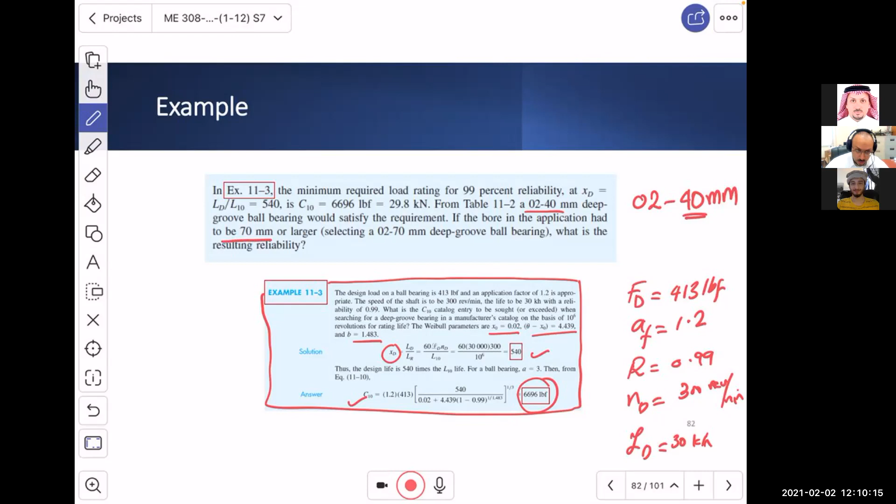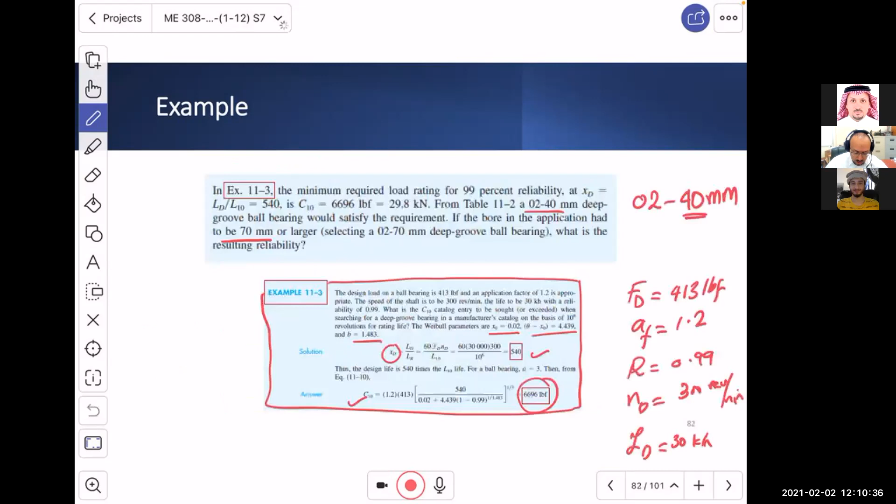Now, what does that mean? Again, I brought you here Table 11.2 for deep groove ball bearings. And what we solved the problem for, which is 11-3, is that we found the load here, 6,696, that was in pounds. And if you convert it and get the nearest, you will find that this bearing, which is rated for 30.7 kilonewton, is good.

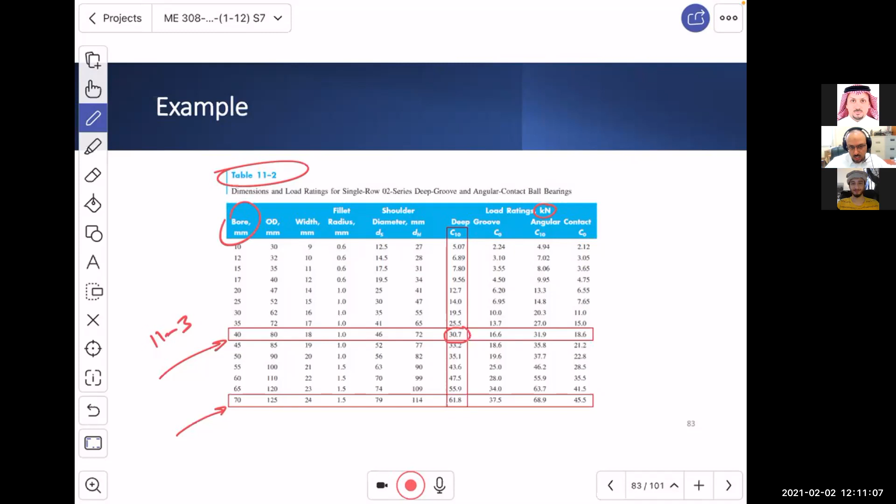Now, what did we use? We used 70. Why? The bore size. We need 70, and there are many reasons why we end up changing the size of the diameter. So that will give you double the rating, that's 61.8 kilonewton capacity.

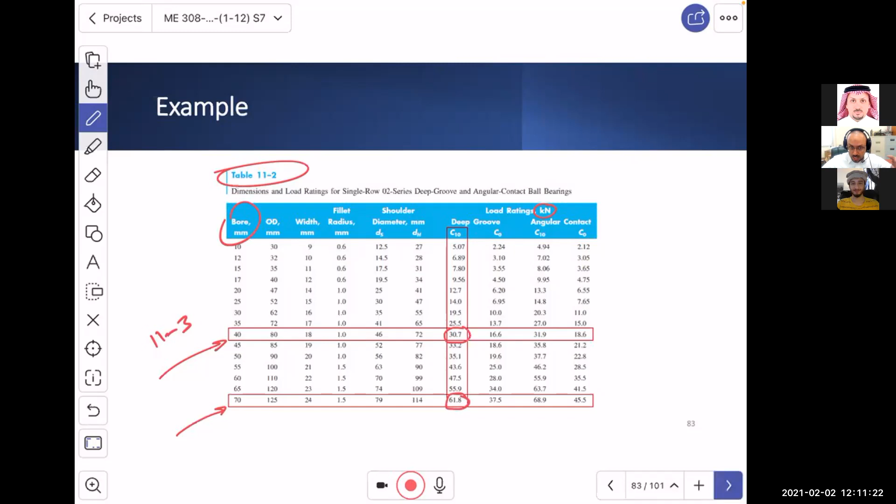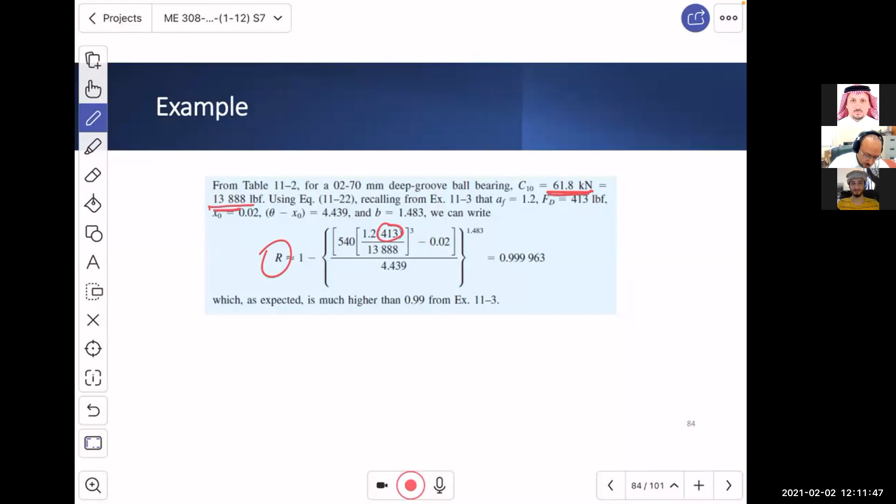So what happens is this: if you want to know the current reliability, you take the 61.8 because you use the bearing with this catalog value. You convert it into pound force because when you apply the equation for reliability, you are using 413 pound force, so you need to be consistent. The life measure is here, this is the rated value C10 over here, and then the Weibull distribution and so on.

So what did we get? We got 0.999963. That's the reliability. Of course, this is expected, and it is much higher than 0.99. Now remember one thing, the wording says it is much higher. Why? In the end, somebody would say 0.99 is almost 1, and 0.999963 is also almost 1.

So what is 'too much' over here? Well, just think about it. I can ask you to go home and keep changing C10 to a higher value, higher value, higher value - same load, everything is the same. And you will see that this is just going to increase a little bit each time. And you can think of it, we doubled the rating.

Previously, we used 40 millimeter with a capacity of 30.7 kilonewton, and what did we get? We get 0.99 reliability. We doubled the force capacity to 61 kilonewton, and how much did we get extra? We got 0.999963, so we got an addition of 0.009963 in the reliability - you may underestimate it. But look, you have to push double in order to get only this. Yet it is considered too much compared to 0.99.

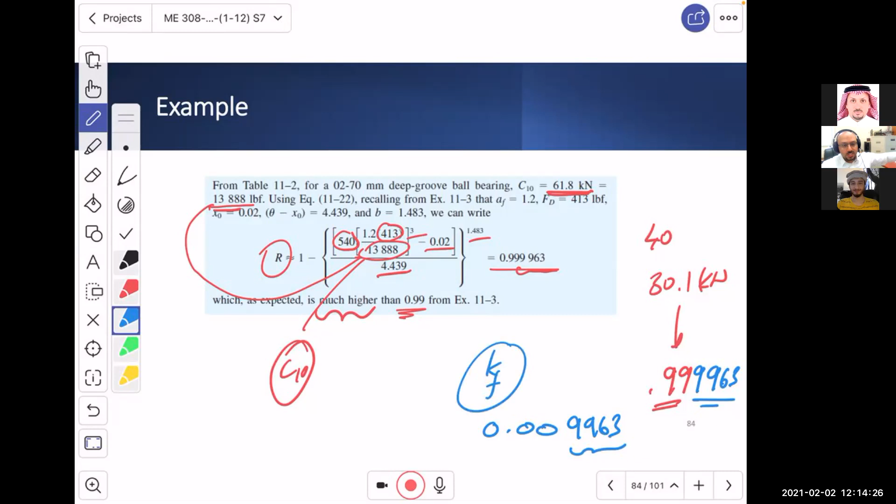Did you get it? So that's when we talked about it in fatigue. We told you, if you recall, in fatigue chapter 6, if you want to have a Kf in the endurance limit increased, to be reliable at 0.9, that factor was very big. But if you want 99.99999, like 5 nines after the decimal, you need to multiply the endurance limit by nearly 50%, if I'm not wrong. I don't recall the exact number.

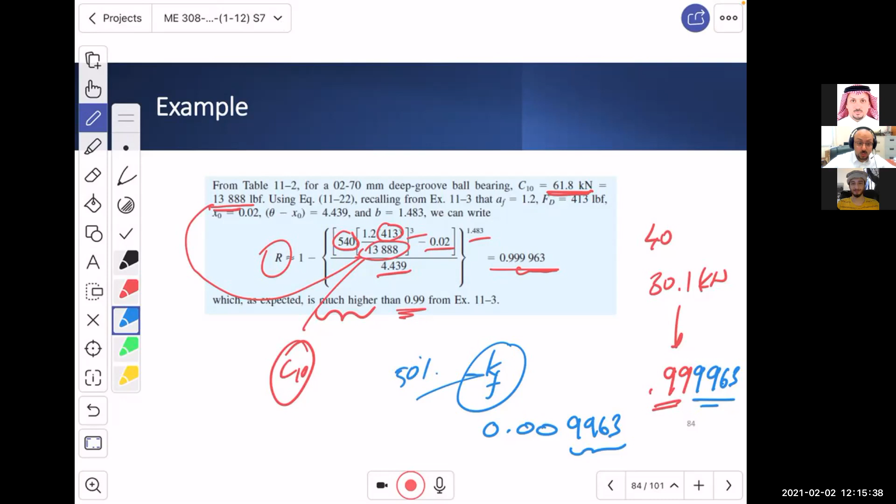So you have a 100 kilonewton, let's say, endurance limit, and now you need to pretend that you have only 50 just to secure a reliability of 0.9999. Can you imagine that? I just want you to understand the magnitude of this thing. So this 0.009963 is not easy to get - that's why it is too much. Understood? I hope so.

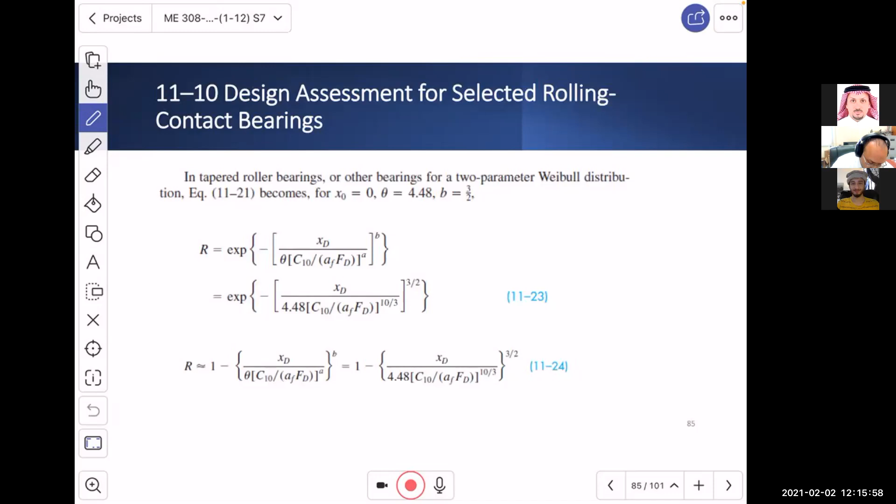Now, what happens if we have a tapered roller bearing? We can use the same equation. Just keep in mind the Weibull distribution parameters: X0 is 0, we talked about this, and you need to remember that A is 10 over 3. So you can just use the same equation.

So if we go back to the problem that we solved in the last class, this is the argument I was talking about. We found by calculation that C10 is 12,100 Newton. And then we said that the reliability was - let me show you this, I need to go back to convince you why the solution did that. So if you go back to the question, it says that if the reliability of the bearing set is to be 0.99, the bearing set - and then we said that the reliability goal is supposed to be the square root of 0.99, which equals 0.995. That's what we said.

So if we go here and look back at this problem, what did we do? We picked bearings, and those bearings, which have a cone and cup as these, if you go to the catalog, then you will find that C10 is this much.

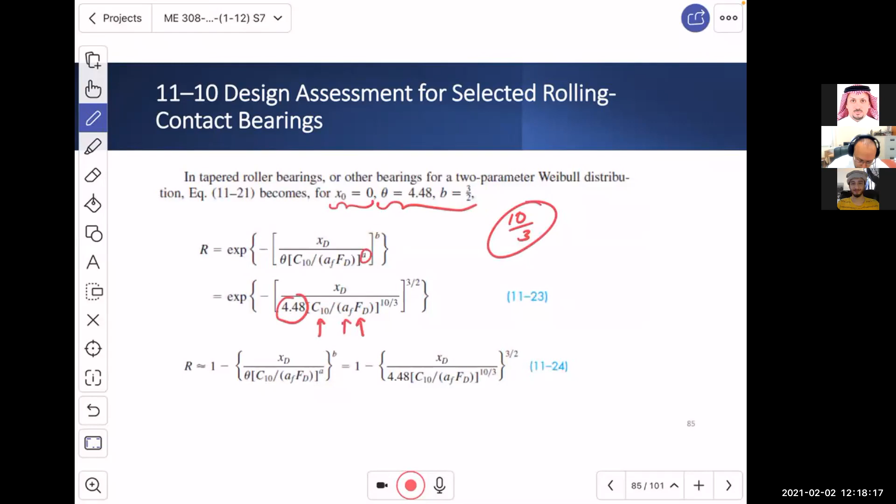Now look, this is C10, this is the application factor, and this is the load. I hope, ya shabab, that you remember that this is FD. It was 4,938. If you got this confused, go back and check it in the solution.

This is what? B, and this one is the A. This is not 1 over B, this is not 1 over A, because we're solving for R, not solving for C. If it is C, then they will have the reciprocal.

Now, how much did we get the reliability? We will get the reliability as how much? 0.99479. Good.

Is this good? In the solution, we said yes, it is. And the question was, how? This is less than the goal. The goal, which is RD, was square root of 0.99, which is 0.995. So what happened over here? We said, that's okay, because the client, you can't force the client. The client said, I want the reliability set supposed to be 0.99.

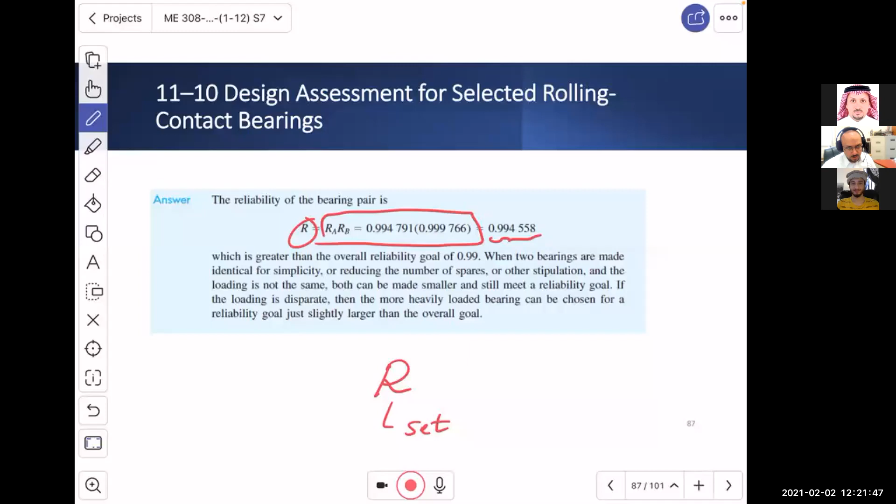And then I told you I have bearing A with a reliability of 0.99 and bearing B with a reliability of 0.97, for example. Then if somebody asks you, what is the reliability of the entire machine with respect to bearing? You multiply both reliabilities, right?

So what happens over here? The reliability goal, remember, I'm going to show you one thing here. Look, I'm going to go back to the question over here and look carefully. When we say the reliability goal, we said that this is RD, which is equal to square root of 0.99, which is equal to 0.995. What did we call it? We call it the desired reliability. RD is what goes inside the equation, for what? For one particular bearing, not for both.

One particular bearing. So we take the square root of the reliability set in order to assign it for the bearing itself, one bearing. Do you get that?

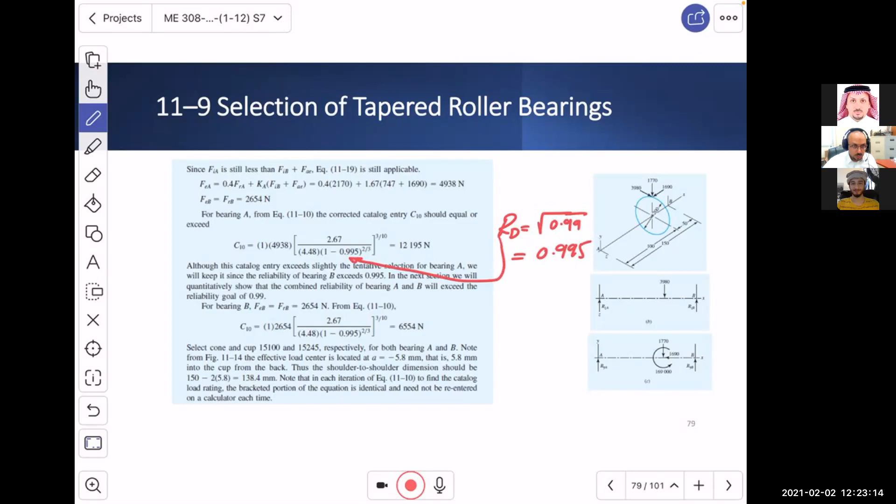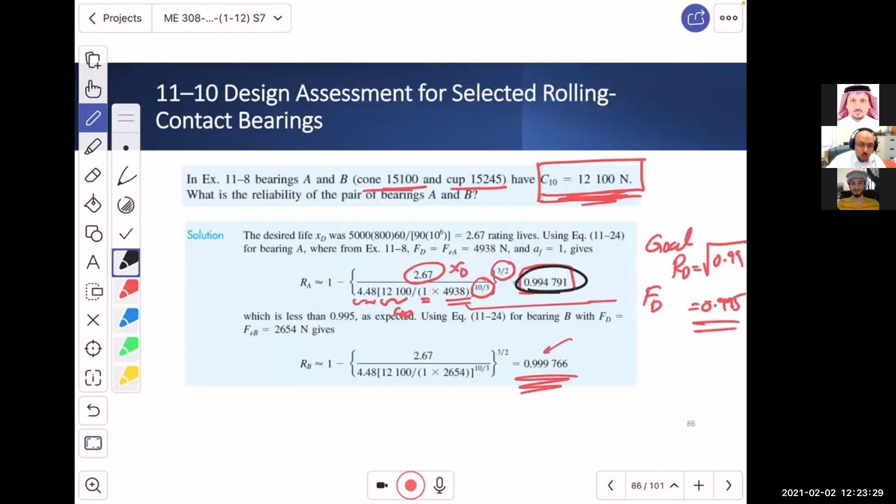Yes. Okay. Now, but what if I picked two bearings like here? I picked two bearings and each one has its own reliability. This is RA and this one is RB. So we go back to the old equation which says that the reliability for the set is the multiplication of both RA and RB.

Now, this reliability is supposed to be compared to the one which the client asked. The client asked for 99%, 0.99 for the set. So what did we get over here? This is supposed to be compared with 0.99. We got 0.994558. All of this is considered much more than this.

So we are good. And that's the reason, listen, that's the reason why in the question it says, oh, the reliability of bearing A alone is less than the goal, less than 0.995.

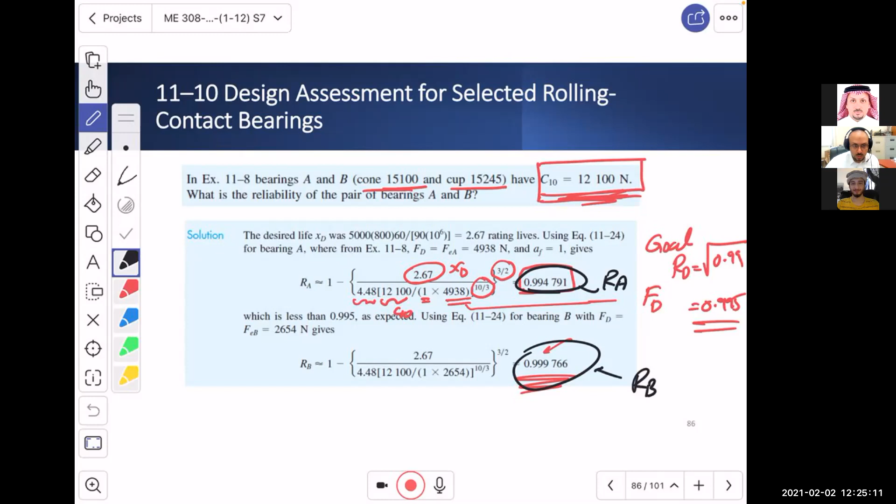It's less, it is 0.9947. But we said it's okay. Why? Because the client is focused on one thing. He said, I want the reliability to be 0.99. As far as the reliability is 0.99, I'm okay. Of course, this is not always the case. Some other client will tell you, no, I want them both to be not less than 0.995. And that's another thing, you understand?

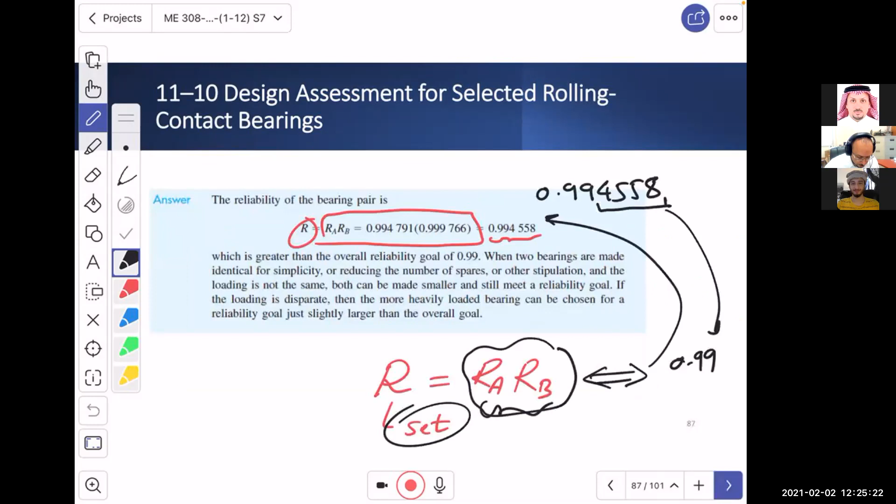Any other question, ya shabab? Okay, now in the next problem, okay...

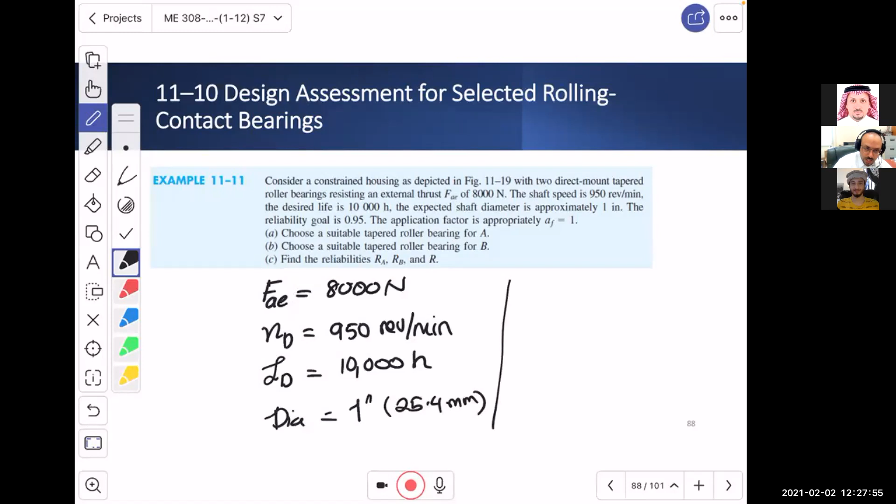You get that? The goal of the reliability, what is it, ya shabab? It's what we used in the equation, which means the reliability of the bearing is supposed to be 0.95. The application factor equals 1, and we want to find a suitable tapered roller bearing for both A and B.

Now, first thing first, there is no radial load, there is only a thrust load. And this is where things become a little different, not as we used to.

So if you recall, with tapered bearings, we are designed to understand that there is a bearing which will carry the thrust load, and there is a bearing which will not. The bearing which carries the thrust load will have two forces acting on it: 0.4 times the radial load, plus K multiplied by the axial load.

Now, what we did before is we said, look at this, this is the axial applied load. Interestingly, just last class, we said this bearing will be subjected to two radial loads. This radial load will generate an axial load and a radial force, and this one will have a radial load and an axial force. And then what did we say? We said combine this and this into one force against the blue one, and that's how we would know which bearing is going to be squeezed, and thus it is the bearing which will have to handle both radial and thrust.

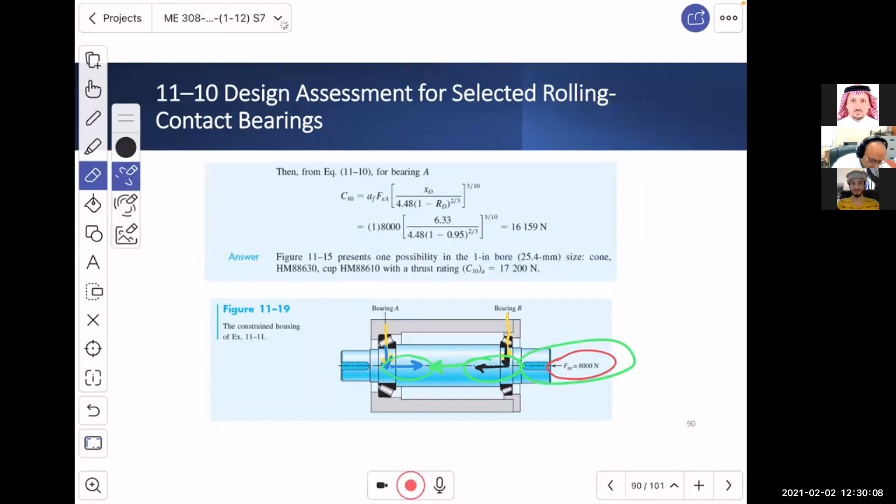Well, all of this discussion is meaningless here. Why? Because there is only one thrust load, and it is pointing toward the bearing on the left. So this bearing is bearing A. Interestingly, this means this bearing will carry all of the thrust, and bearing B will carry zero radial load, zero thrust load. It's just sitting there alone, doing nothing. That's where it gets weird.

So if we do that, and you truly believe it, then you will know that FrA is the same as FrB, which equals 0.

Yeah, this is it. FI is equal to 0. There's no radial load, and if there's no radial load, remember, the induced load because of B is equal to 0.47 FRB divided by KB, which equals 0. And the induced load FIA is also 0.

In that case, you end up with the axial load at A being the same as the axial load applied at the shaft. What is the reliability? Both of them should have a reliability of 0.95. We can use that right away inside the equation.

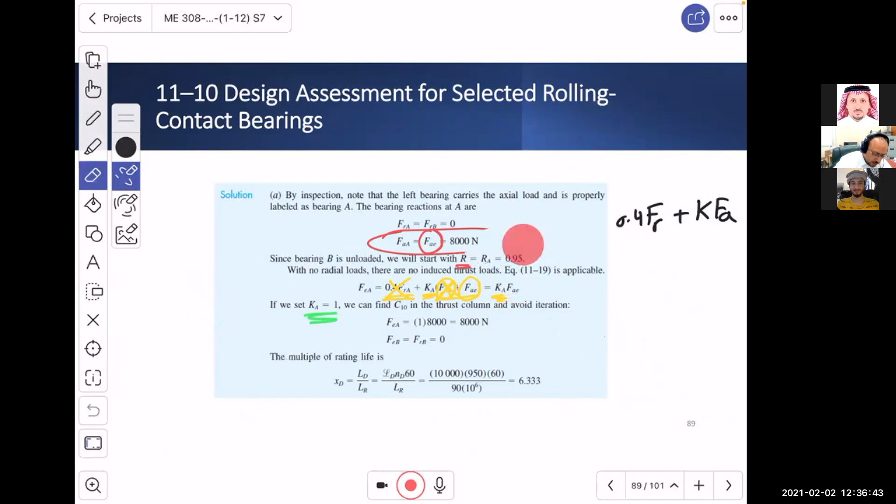That's it. Okay. Okay. Okay, alright.

What, can you repeat the question again? Wait a second. Yeah, I said, is it like the ball bearings part where if we're before E, FR and FA are almost equal, and after we cross E, we have to increase the thrust value? Sorry, FT and FR are equal to each other. I got you, before E. Yeah, I got you, I got you.

Well, what happens is that's not the case though. Why? Because before E, the curve goes as a straight line. Let me see, no, that's not the case. Sorry, I said yes, but this is wrong. Before E, the curve goes as a straight line. That straight line is not the same as a curve which is inclined with a slope y equals 1, which is what we are saying right now.

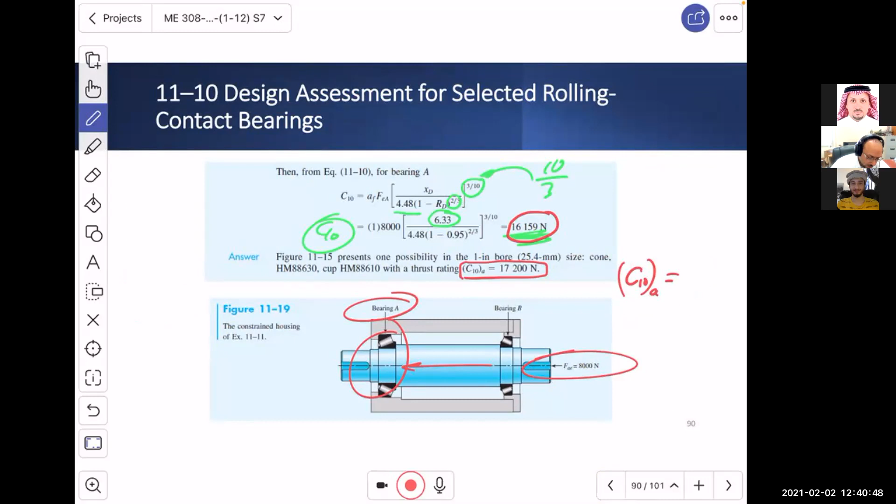C10 is 16,159. So the catalog value for this bearing is higher than that, which is 18,400 Newton. And C10A, that's the C10 axial, the rated axial load for this bearing, is 17,200 Newton. All right, so that's the value over here.

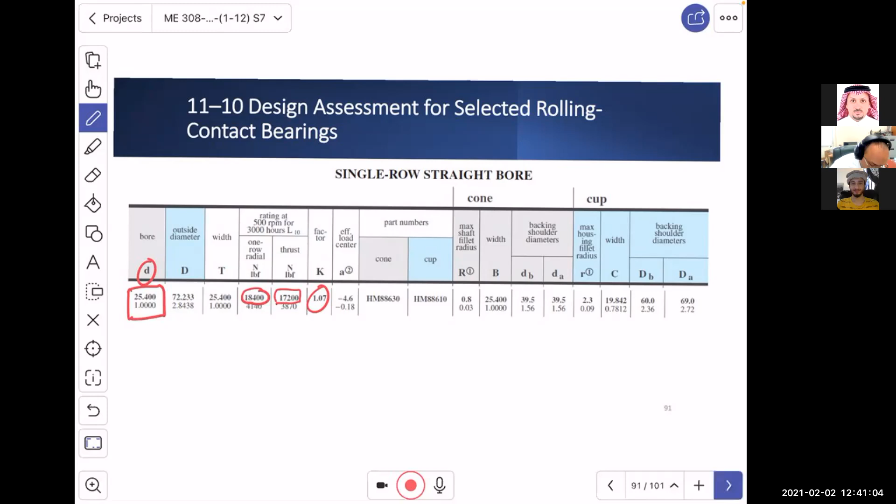Did you get this? Yeah. All right, so next is to go and calculate the reliability.

So if we want to calculate the reliability, we need to put XD. Look, these are the Weibull parameters. We are using the thrust load catalog value, because the load that we have is only a thrust load. And what happened over here?

If we put this, notice that FD for bearing A is equal to what? 8,000 Newton. Was it in Newton or in pound force? Newton, yeah, 8,000 Newton. So when we do that, what did we get? We get a reliability of 0.963.

That's more than the goal. The goal was 0.995. Okay? No, this is, no, 0.95. The goal, what is it? Let me check the question. Yeah, the goal was 0.95. Okay, so this is more.

Why? Because we have a load which is like 16,000 something, and we put a rating of 17,000, so we got a little bit higher reliability. For the other one, the load over here is 0. So you can imagine that if you have 17,000 divided by 0, it's going to get you an infinity. This number divided by infinity will push this to 0, and you will have 100% reliability. Well, of course, there is no loading acting on it.

So the combined reliability now is the reliability of bearing A and bearing B multiplied by each other, and this is what we got. Understood, guys?

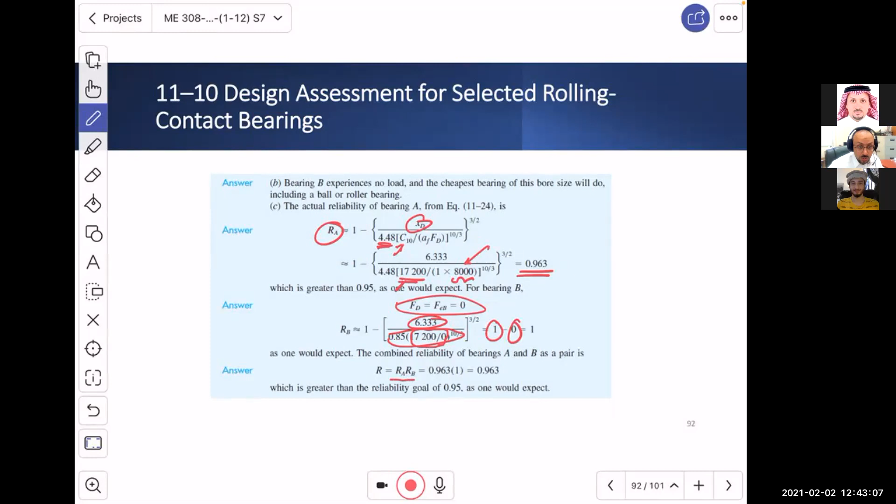Yes. Okay, now there are a few other things that we need to go over with respect to the bearing, so I'm just going to talk about them briefly over here.

I would encourage you, these are the kind of situations that you will see in the industry. I know some of you, or maybe the majority of students, think that we are teaching you stuff that you don't use in the industry. But if you go and read this book, especially the writing, you will find a lot of information that is actually very practical in the industry.

Also, I would like to tell you, and you know this more than me, if you found any information that you are not familiar with, go and search it. This material of bearings and gears is very popular. You can see a lot of videos on YouTube and the internet.

So in here, for example, we are talking about the matter of fitting the bearing. So we have an annulus over here. So we want to make sure that that annulus, for whatever practical reason, will not be bigger than the outer diameter of the bearing, so the bearing can sit from this side.

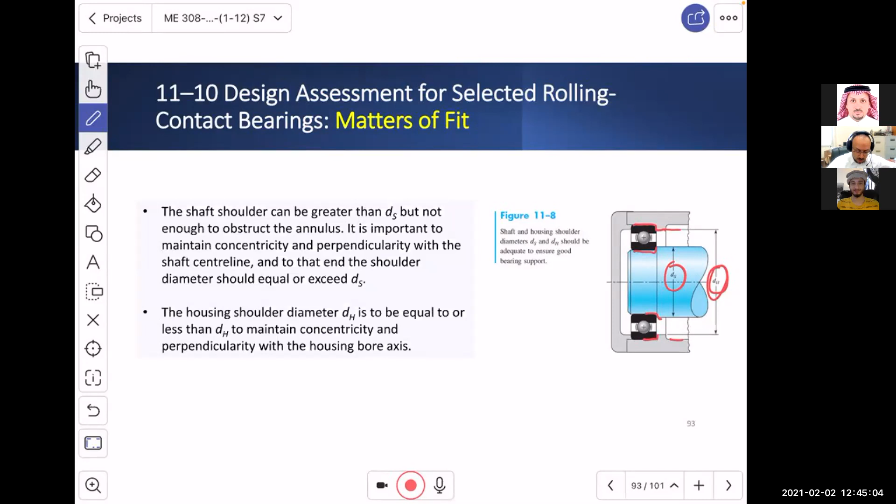Also, we have the shoulder here of the shaft, which is also very important for placing the bearing in its position. So you want to make sure that the sizing for the other parts of the machine, like the housing, the outer diameter, the big diameter, the small diameter, are all aligned with what's supposed to go with the bearing.

Similarly, if you have a tapered bearing, we all know that we have here like dB. Look at it from the back, this diameter, as well as this diameter, as it is explained in the textbook.

You want to make sure that these diameters are within the seating arrangement. So if you put the bearing from the back or the front, you want to make sure that these diameters are within an acceptable tolerance and size with respect to the shaft and the shoulder.

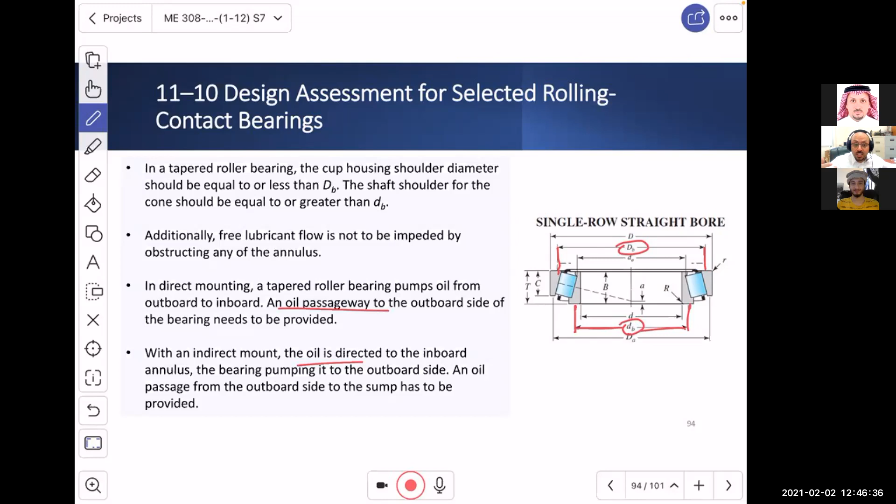You also need to understand that most bearings, especially in industrial applications, need lubrication oil. So a turbine or a pump is equipped with a whole system with a pump, storage, filtering, and cooling where oil circulates. You need to keep in mind that this circulation of oil means you need supply pipes and tubes, one to take the oil out and one to push the oil in. That needs to be considered while fitting up the whole thing.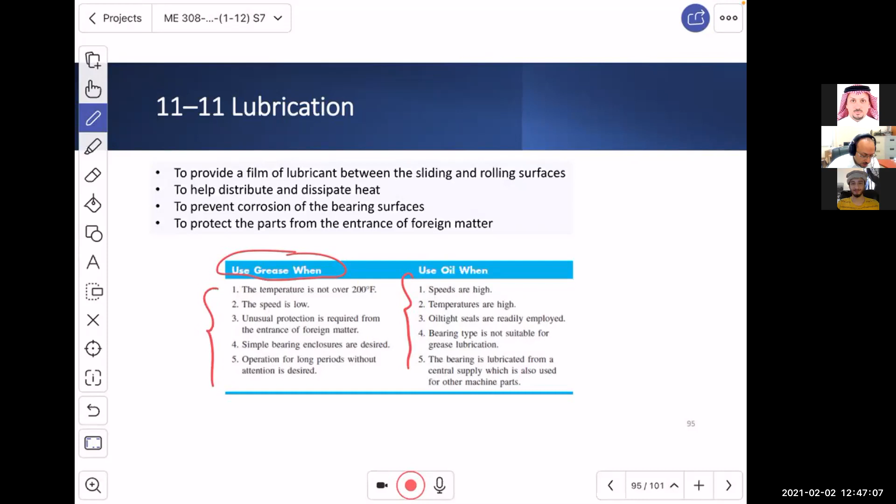Now, with respect to lubrication, we have two types. One is called grease, and there are recommendations for when to use grease, and the other one is oil. Grease is more viscous than oil. Oil is runny, and its viscosity is different than grease. You will see that this is also related to some other issues, which I'm going to show you.

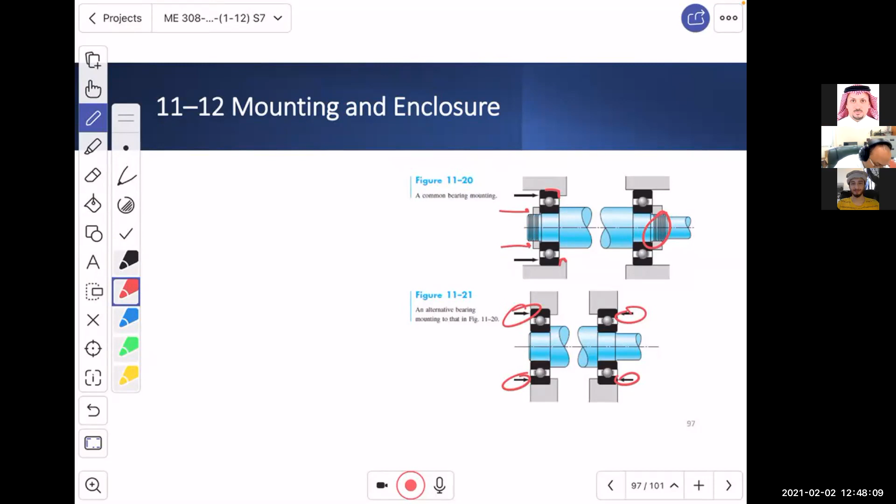So then what they do is use other ways. Look at these other forces. There is a casing or a retaining ring, or any other arrangement, to make sure that the bearing is securely locked within. Look here for a tapered bearing - you can also have a different mechanism like these, which look like a washer.

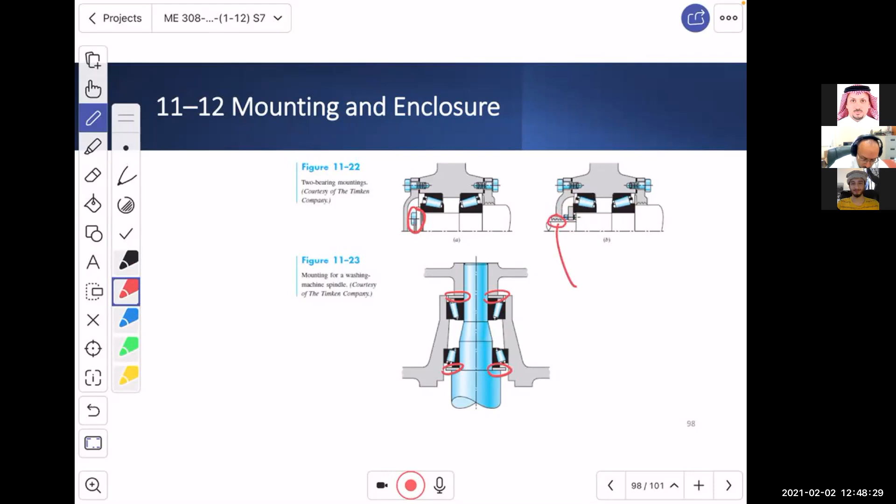I want to show you this, we have like one minute. This arrangement is usually associated with a labyrinth seal, which is very common in high speed applications where the RPM is too high. This is the enclosure, which is a kind of sealing - there are different types, and if you read the book it will tell you the main governing factor for deciding which way to go is either grease or oil, and the speed. This labyrinth seal is very common in turbines and pumps, and if you go to Aramco you will see it a lot because it is used for oil-based lubrication and high speed.

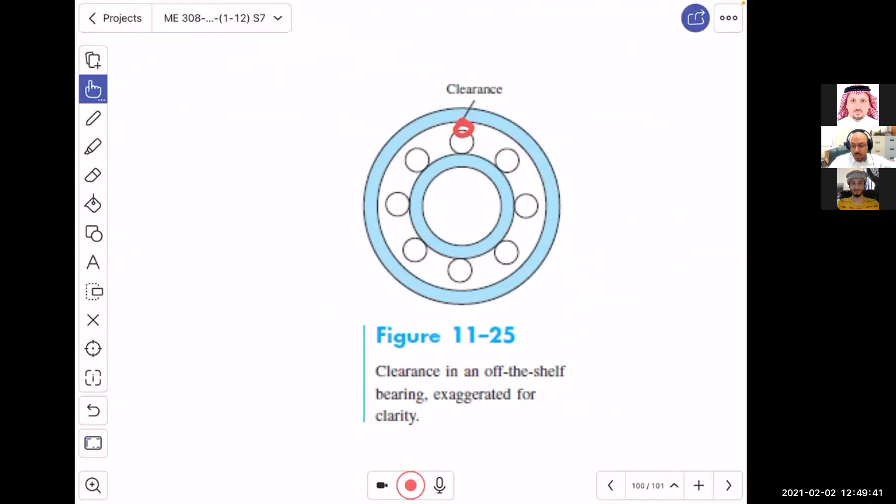Similarly, there is also the matter of clearance. If I zoom this in - sorry, I'm going to get late for one minute - this is a clearance that needs to be closed in some applications, especially when high precision and high speed are required. So how do you close that clearance? By preload - they preload the bearing to close up this gap.

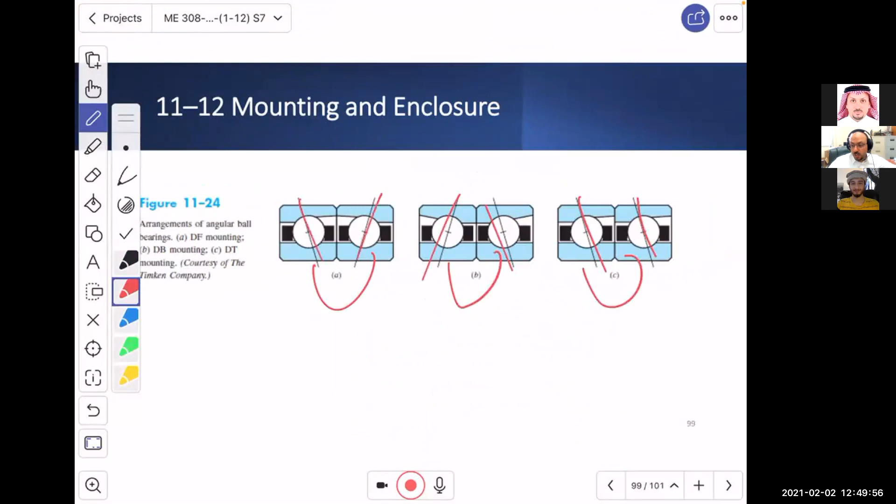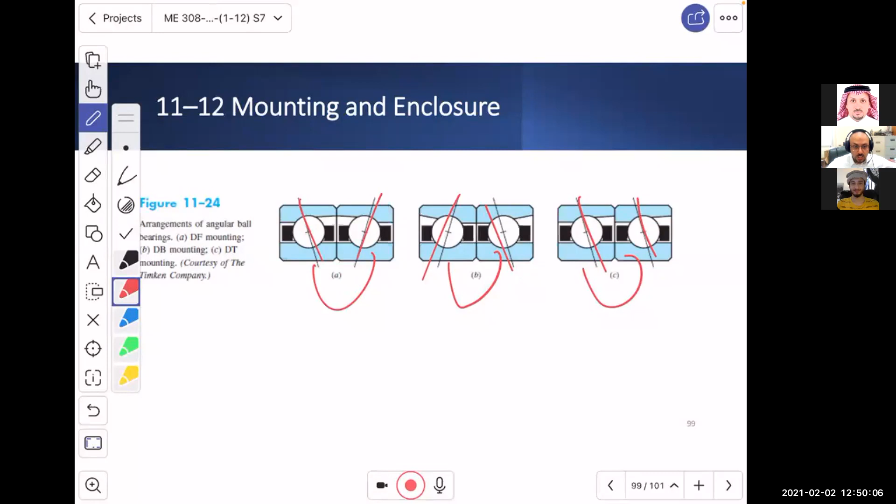Also, duplexing - it's called duplexing when you use two angular bearings, and you orient them in a way where the thrust, because angular bearings can handle thrust, is resisted in one direction or cancelled out. So this is also very important.